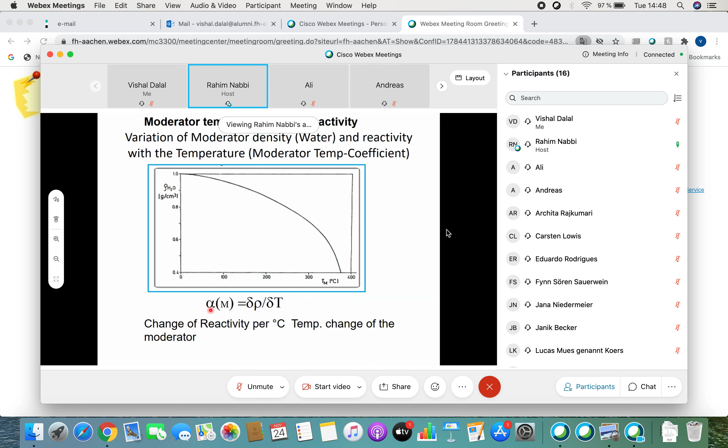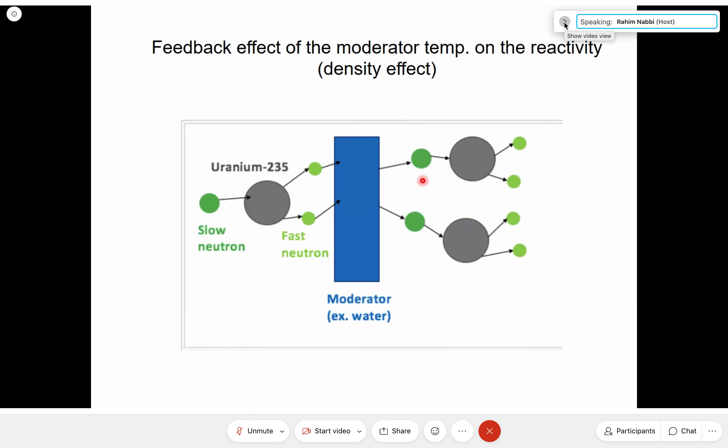The temperature coefficient of reactivity for the moderator is the change of reactivity per degree centigrade change of moderator temperature. The mechanism responsible is density: the higher the temperature, the lower the density of water as moderator, consequently the scattering rate is lower, and consequently there is a reduction of reactivity.

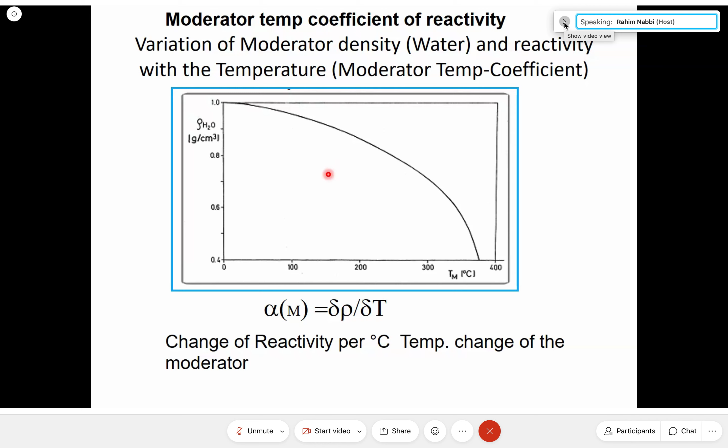Now, how could the temperature be determined? In order to get it, we have to solve the Fourier equation, similar to the neutron case. I said here is neutron current, but here it's heat flux, like we have neutron current or neutron flux in the neutron diffusion equation.

Here, change in temperature, derivation with respect to X, Y, Z. In the neutron diffusion equation, it was derivation of the flux, and there we had the diffusion coefficient. Here we have conductivity, because it is heat. This is the heat conduction equation, or Laplacian equation, similar to our diffusion equation.

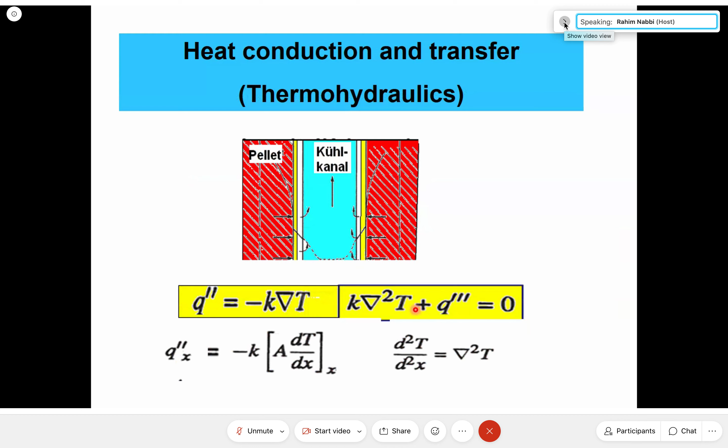Here we have a source term because of fission, how much energy or heat is produced because of fission. And here the second derivative of temperature, there was flux, and here again the conductivity. So if you solve the heat conduction equation, like in the neutron flux or diffusion equation, you get the temperature shape: high in the center of the rod, and of course lower at the boundaries.

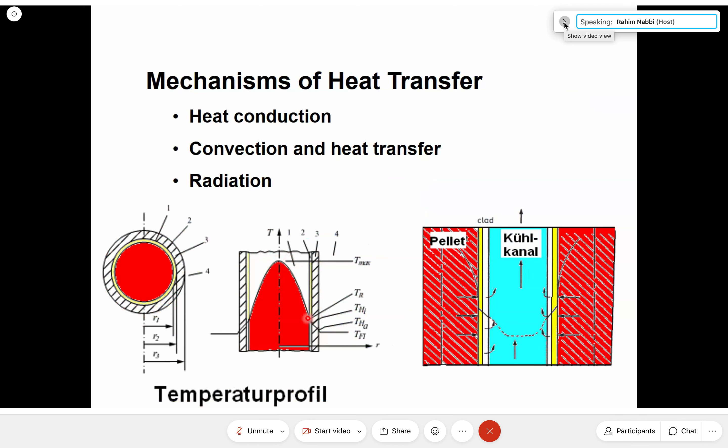And there is one additional relationship. Here is the solution, and you get the temperature maximum in the center, and at the outer boundary the difference depends on the radius of the fuel pellet in this case. So all this describes the temperature profile in the rod.

But what about the temperature in the coolant? It is then obtained by applying the heat transfer relationship, like this one here: this is coolant temperature, this is surface temperature of the solid material, for example the rod. The bigger the difference, the higher is the heat flux from the solid area to the coolant. H here is called the heat transfer coefficient, based on empirical correlations.

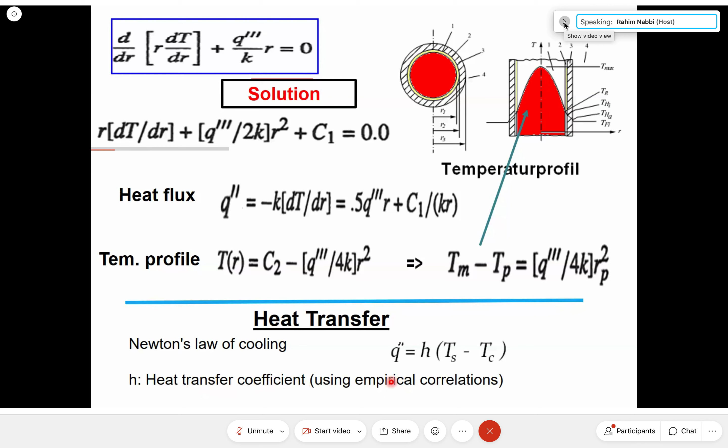I'm not going to repeat it again, but anyhow you can determine exactly how the temperature increase takes place from the bottom, from the inlet of a channel, to the upper part of the cooling channel. At every segment, heat is transferred from the rod, the red area, to the coolant, and the heated water goes as inlet to the next segment and is heated up again, so that at the end the temperature changes from inlet to outlet by a large amount.

You see here the relationship: temperature change because of the mass flow depends on the mass flow. The higher the mass flow, the less is the temperature increase, depending also on heat capacity. This is the temperature increase inside one segment, for example from here to here, or the channel from here to here.

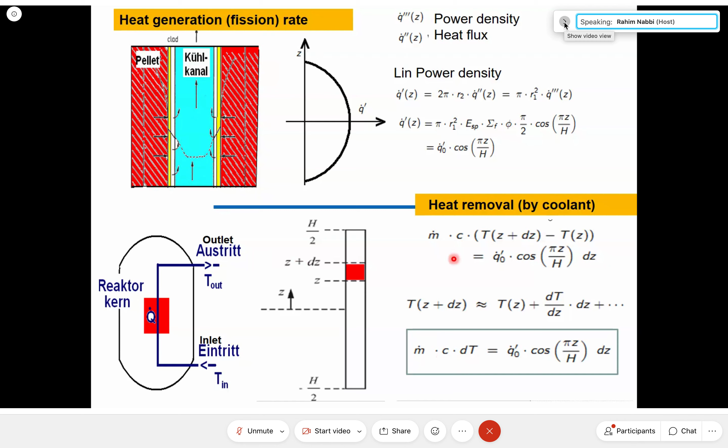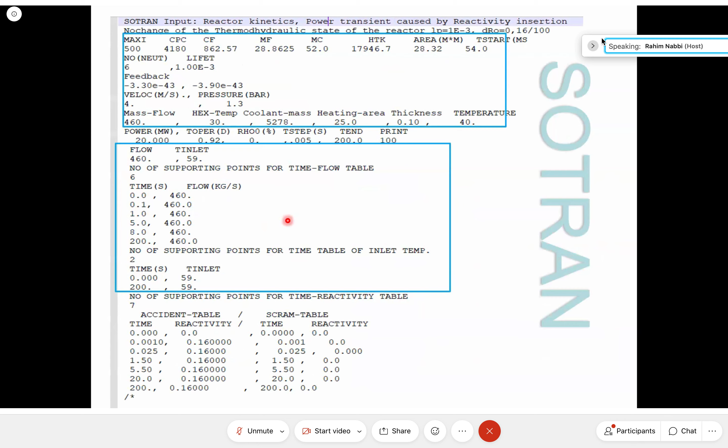Good. Now, I said during the last lecture too that SOTRAN is a multi-purpose code or package. It can be applied not only for reactivity incidents, but also for heat transfer phenomena and processes, and for mass flow, pumping failure, for example, different cases. For this reason, it should be applied for that type of case.

I would like to stop the presentation here. Today I told you we are going to use the SOTRAN code for two different packages: package one for neutron kinetics, and package two for reactor dynamics. There are well-defined questions here, and the answers to these questions should be produced or given by the SOTRAN application.

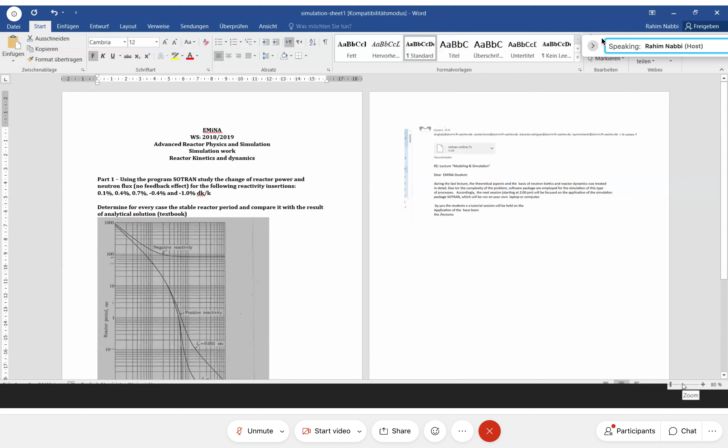Using the program SOTRAN, study the change of the reactor power and neutron flux, proportional to each other, with no feedback effect, for the following reactivity insertions: 0.1, 0.4, 0.7, -0.4 and -1% delta K to K. You remember what the unit is.

Good. And then determine for every case the stable reactor period. You remember the procedure for the reactor period, and compare it with the result of the analytical solution.

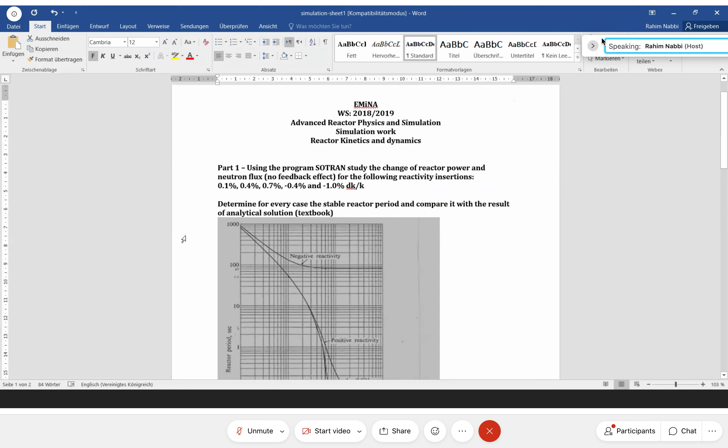Regarding the analytical solution, one point is, you remember this diagram? We saw this diagram today too.

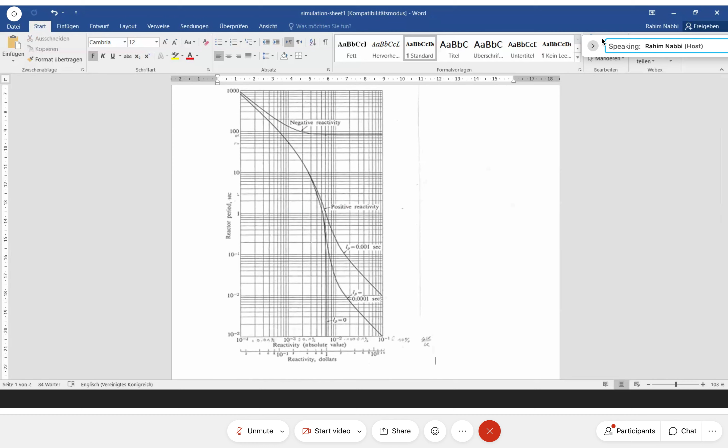If you take, for example, the 0.1% case, it means you take this value here, reactivity 10 to the minus 3, because the unit here for reactivity is absolute value. But in the question it was 0.1% delta K to K. That means 0.1 in absolute unit is 1 times 10 to the power minus 3.

And then you go here, positive reactivity, and you can read down how big the reactor period is. One can compare this with the very precise or correct solution from SOTRAN.

That is one comparison. The other one is you take the general analytical solution we discussed before. You remember this formula?

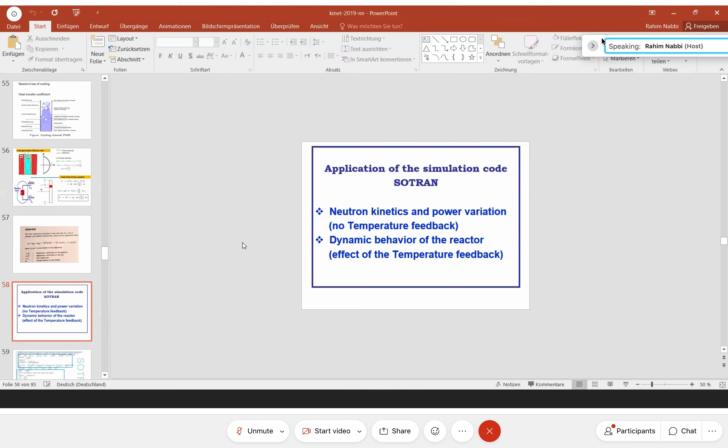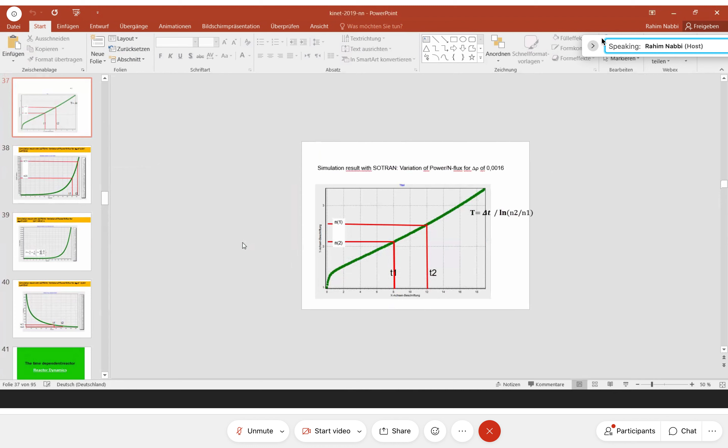So this formula, you see here, that is the stable reactor period. The inverse of this ratio here is the reactor period. So that gives two ways.

Again, from the graphic and from this relationship. For example, in the case of 0.1%, you need only to put for rho 0.001, and beta is available there, lambda is available there, and you can calculate.

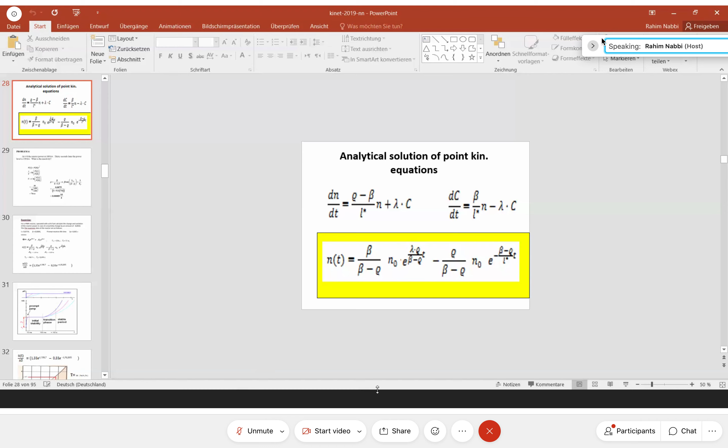And for the other cases, exactly given in this example, it is similar. There are other values, so similar.

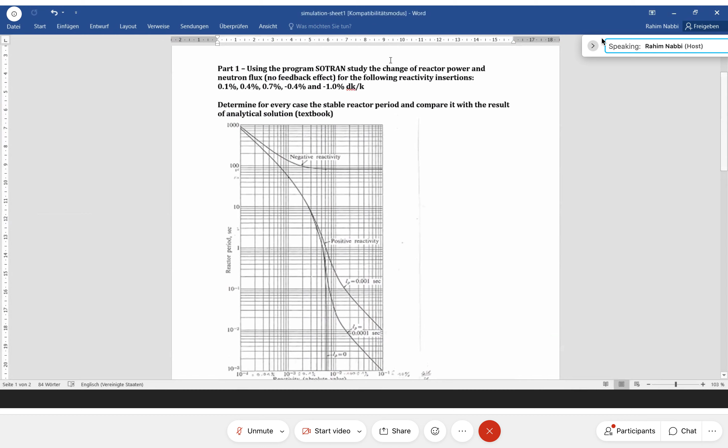And then the second part, second question, is to calculate the reactor's behavior, now dynamics: power, temperatures, for reactivity insertion 0.4% and 0.7%, under the consideration of feedback effect dynamics.

So in this case, again we run the Fortran code, but there is one line inside the input file describing the reactivity feedback effect. One is the temperature coefficient of reactivity for the fuel, and the other is for the moderator. For the reactor kinetic case, these two numbers are put as 0. But in this case, session 2, it should contain real or correct numbers.

And you would then get it. If we do that job, I would like to then tell how big the two numbers are.

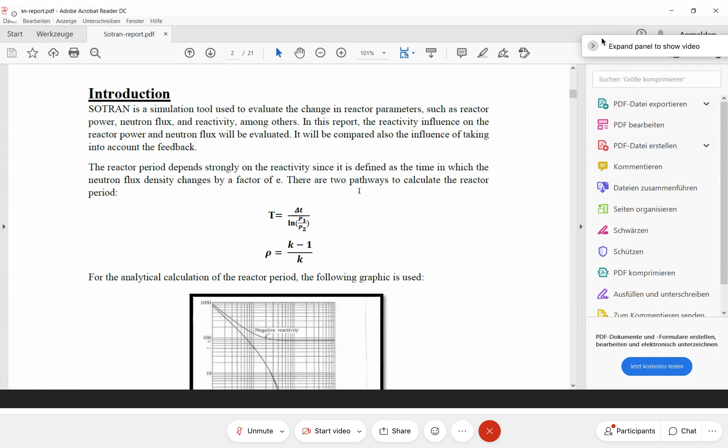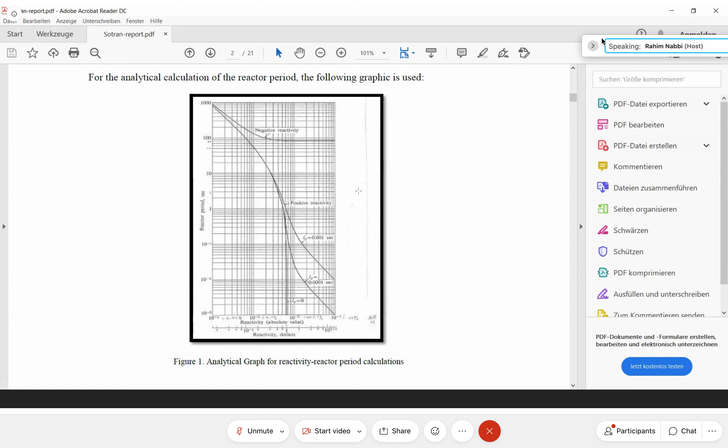You see here, that is the similar case. You remember the same diagram, in order to take the theoretical value and compare with the simulation results regarding reactor period.

So exercises, here's case 1, and you see here graphics of the reactor power log for 0.1, here is the time, and here is the reactor power. How do you get the reactor power?

In order to make a plot here, I would like to explain what the way is, because you have on your folder, which was sent to you, one additional plotting routine, and you can take the result of the SOTRAN calculation or simulation, and using that plot routine, we can produce such graphs.

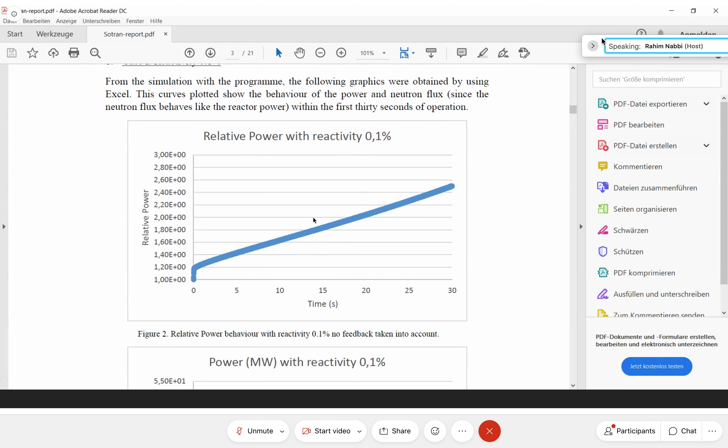And then we can determine, according to the formula—remember here, the formula here—according to this formula, you can determine the stable reactor period, and then again compare with the theoretical, two theoretical ways.

Good. So now I hope everybody could download the folder I sent to you. So it looks like...

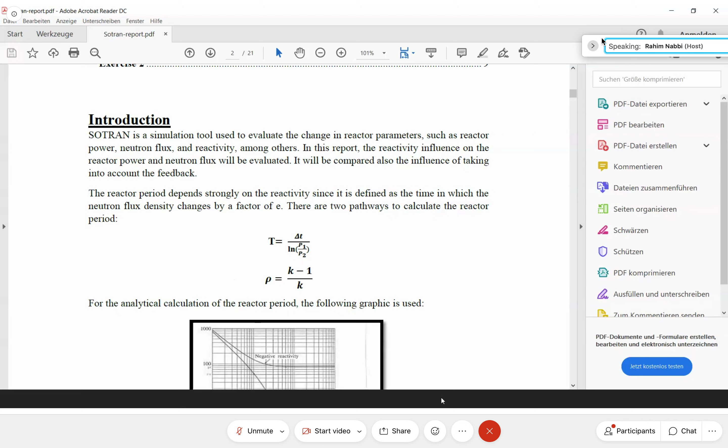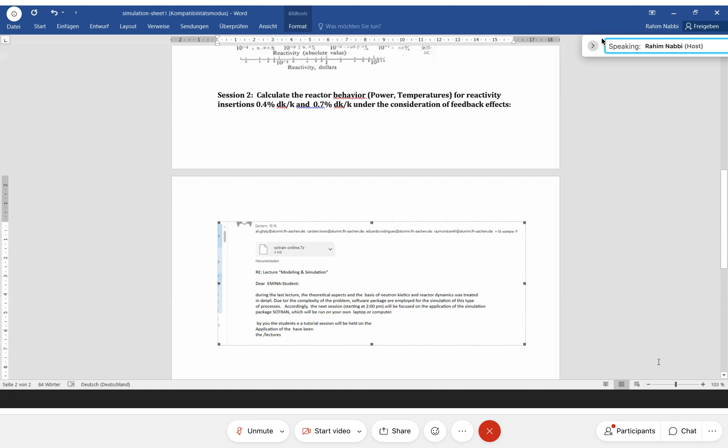You remember that this type of email was sent to you? You remember? And this email had attached a folder.

So the point is, now this folder is available on your email. Good. And I said what to do. The way is, you should first open your email and then download this 7-zip data file or folder.

If you download it, maybe it would be placed in your download list, or you can download it as a 7Z folder in any folder of your own. So after doing that, you can then unpack it. Because in this case, the packed case is not applicable.

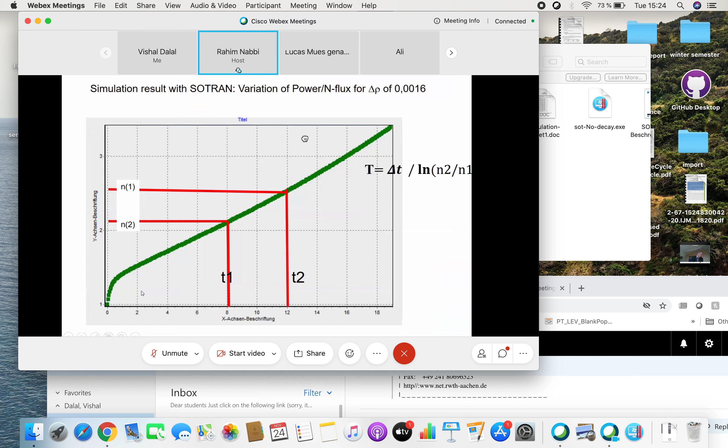You see, it is normalized to 1. That means if the power is 2000 megawatt, then every value has to be multiplied by that number. So it shows here very clearly an increase because of the reactivity insertion. See here? And one column here says rho 1. I hope you see it.

Rho 1, see here? In this case, in my output, it is 0.4%. But the first exercise, the first question, which has to be analyzed by yourself, is 0.1. That means it should be 0.1% delta K to K. Good, you see here very clearly.

So, rho 1, you see this column here, and then I go back to the third column, power D. This is decay heat power. I said before, because we produce fission product precursors, like the source for delayed neutrons, they produce power too. This is the fraction of the delayed decay heat, in this case 0.6%. Then the next column is flow rate, normalized to 1. Doesn't matter, because it has to be multiplied with the initial value.

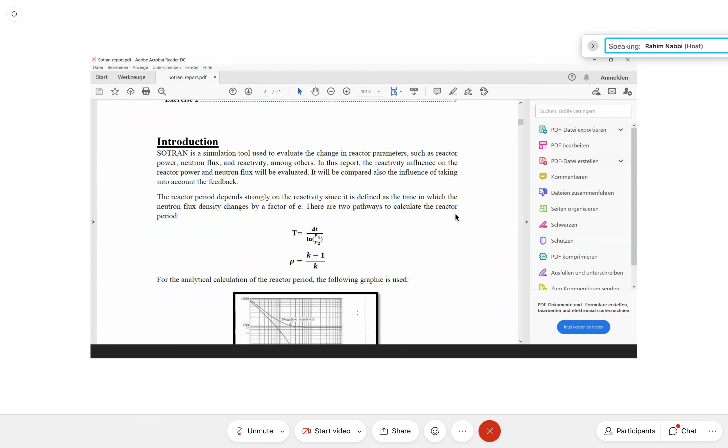You remember, like in other report, here in this report, you see power as a function of time. So this can be plotted by that routine. You don't need any additional program for it.

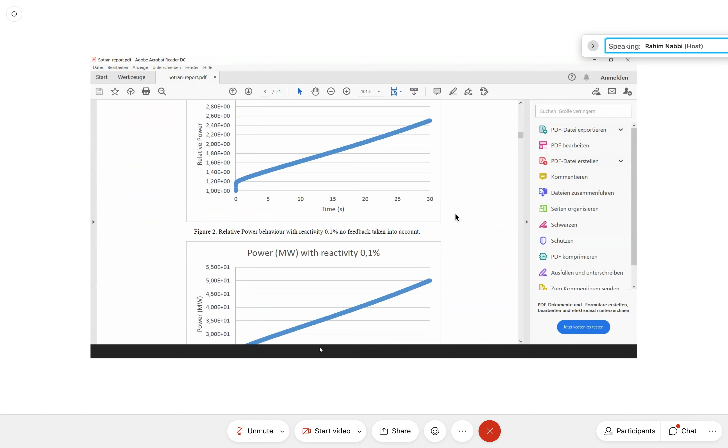So you go, click on it. You see, you get a warning. It says something cannot be opened. Please ignore this information. You can say okay, and then a new screen you find here, and this is for plotting instruction.

What data file do you want to plot? You can put here the name of, for example, what was it? I don't know how you named it. In my case it was rea0.1.out. I can put this name here, or I can take the button in the middle.

It says search for data file. If you say, Professor, we are just seeing a green box for the plotting program - moment, then I have to give it free. Moment.

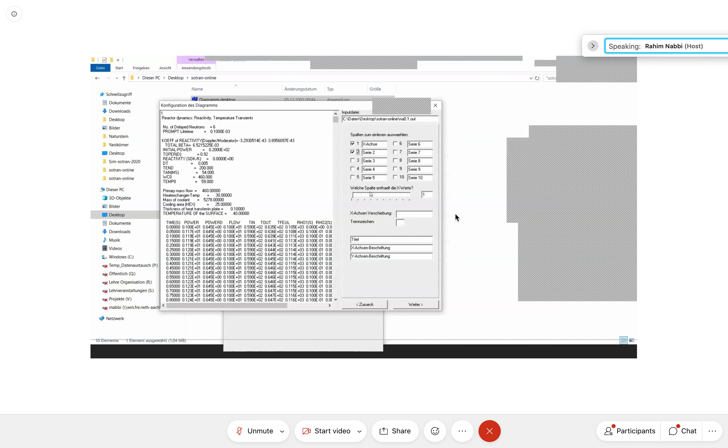So then you see here there is one additional box. It says what column should be taken for the x-axis. Here at the right-hand side you see 1. I hope, sorry, maybe you don't see it. So, do you see that - is then, I hope you have it.

If you have selected your data file in that screen and then say okay, then this screen would be appearing on your computer. So then that means your output file. And first step is, again, you see here at the top the name of the output file.

Then what columns or which columns should be used. The first one is x-axis, the second one here highlighted - second one would be then power, I am interested in. So, and then at the end of this box, the series, you find here what column is X again - it is 1, and you can put here, here's the x-axis for shifting and so on.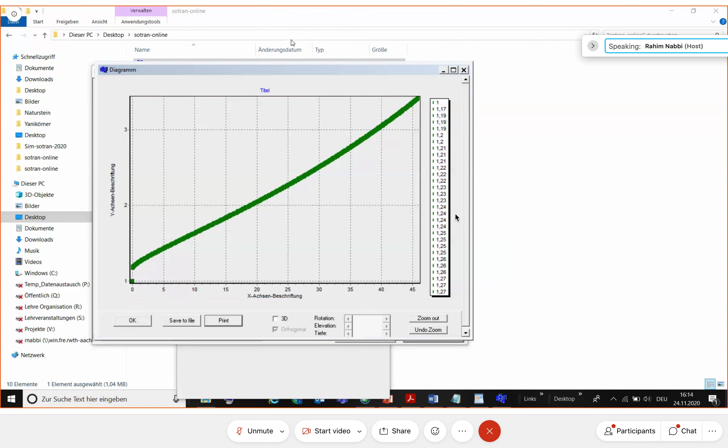Maybe you don't see, I can make it free. Oh, do you see it? Oh, you see it. That is the plot of our results.

And we didn't define any title for the y-axis or the x-axis, but everything can be set. We can also make it three-dimensional, something like three-dimensional, like here, for example.

So that would be then the power against time. So you can calculate here the reactor period. In order to make the reactor period, you remember we had one example: you take two times, for example at 25 and 35, and read down the corresponding value for power or flux from the y-axis. Use the formula, remember, delta T divided by the logarithm of the ratio of the fluxes. Then you have the period. Okay?

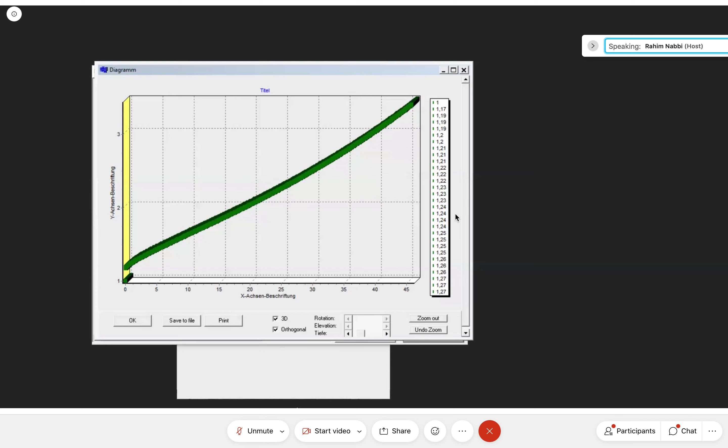I got a question, because when I wanted to plot the diagram, it just says that my program is not functioning. It says keine Rückmeldung mehr and just resets - no reaction from the system.

Correct. Yeah, maybe the reason is it didn't find your output file. You should then first search the bottom and the middle, sie durchsuchen.

Oh, I got the file, but after I marked all the data and want to do the plot of the graph, it doesn't work. Look, maybe your output file doesn't contain any values - look at it. No, it's the normal file, it has values.

So, did you delete the text line? Yes. Can you give your screen? Yes, I can share my screen, one second.

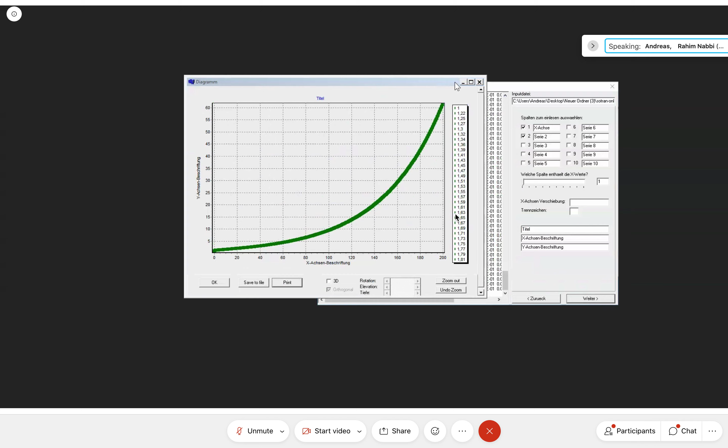Yeah, is that yours? Yes. No - when I click on... oh no, it worked! It works, yeah, but before that it just said keine Rückmeldung. Okay, then it's okay, the problem has been solved. Good, very good.

So, any further questions? Is everybody an expert in the application now? Maybe I have a short question. Yeah, please - I was just curious because...

Well, in the input file we just said that we have a reactivity of 0.1, put there, but in the output file, if you look, it just says 0.1 E minus 1%. Yeah, don't worry about that, because it is not a mistake in the output file, but it divides by itself by 10. That means if you find there 0.1 E minus 1, it means exactly 0.1. It is something inside the program.

Okay, so the important thing is what we write in the input file. Yes, exactly, you should be careful - only take that value which you have in your input file. Okay, and the number at the output is the same number but divided by 10.

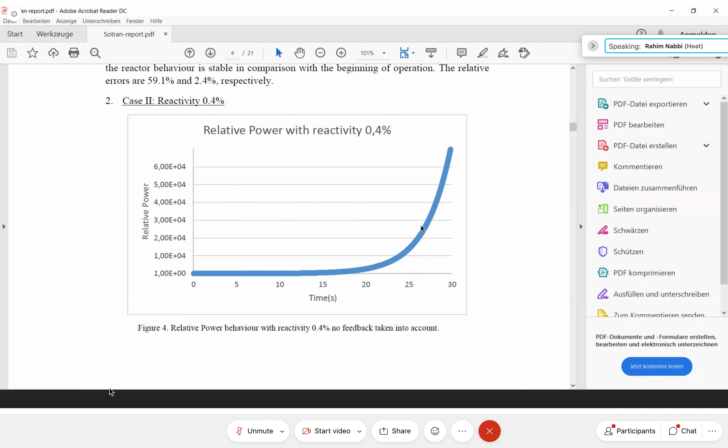Supercritical because this reactivity insertion is bigger than the contribution of the delayed neutrons. Practically, the reactor is not controllable. For this reason, you see here a jump to very high values. But anyhow, you can determine it.

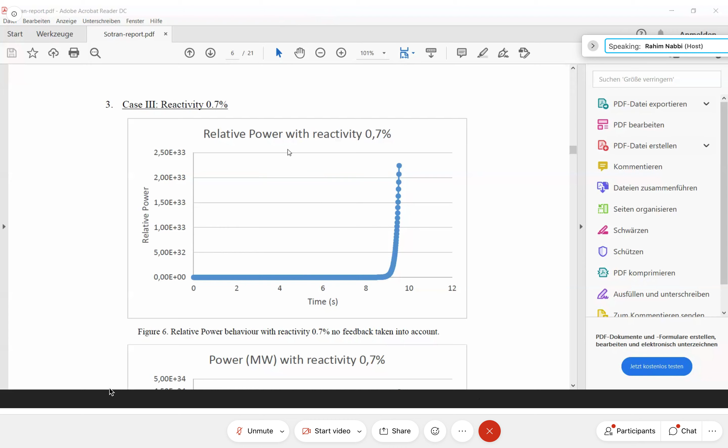But partly you can then, by checking these numbers, you can print every 10 steps or after every 10 steps or after every steps. You can control it, your output or your plot, by the variation of these numbers too. It is additional tools in optimization of your plots.

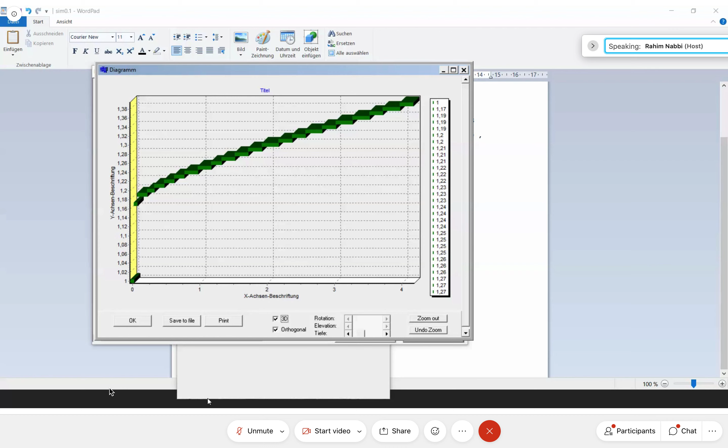Again, first you take one of your input files, for example sim 0.1, first rename it to, for example, 0.7. Then copy it to 0.7, open it, and at the bottom replace all values here, 0.1 to 0.7.

You can do it in one step with find and change, or find and replace, like here. Then you save it at the top left, not with a new name. You can run it, it's no problem. Go to your folder.

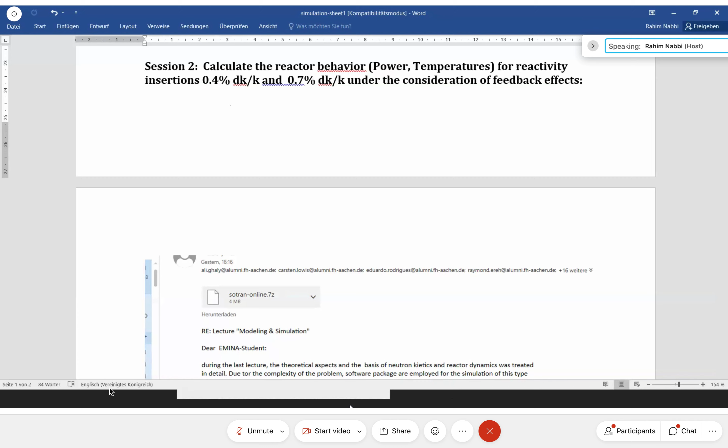You remember? And you take for this case your same input file. Do you remember the input file? Input file is 0.4. I hope you see it. So that is your input file, here, 0.4. First, rename it,

because now is the dynamic part. We call it sim 0.4 minus dy, dynamic. So only that. Or maybe it is better first to copy it in order to keep the kinetic one. First copy, and then insert. See, that is the copy now. And this copy should be renamed to dy, dynamic.

Now, if you have this frame, you open it. You should look to this input file for the dynamic case, and then shade it as you know. So I hope this is that one, you see? At the bottom of this file you see your number 0.4 everywhere, but at the top everything remains the same. No change, but you see the 6th or 7th line here, feedback.

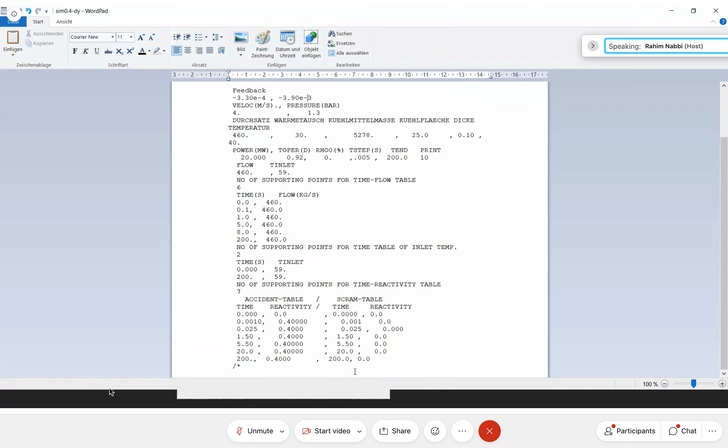So, and then we go to your folder, the new or dynamic case is available here. You run it, so run exe file. So it says you have it.

So again, I share it with you here. See, now input, say sim 0.4 minus dy INP. Then here the same, sim 0.4 minus dy minus out.

Is there something happened? No, it's correct. So you see this data file? You can open it. So I hope you see the output file.

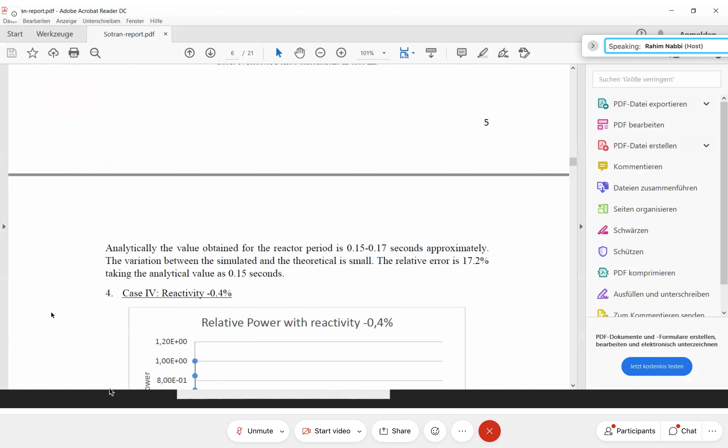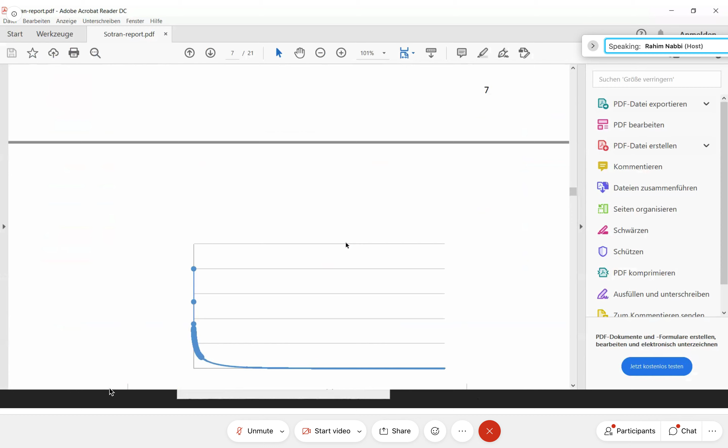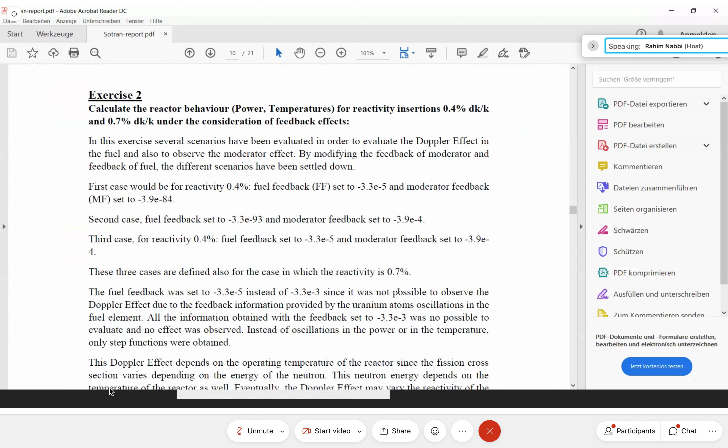The negative case. Exercise 2. You see here power for the 0.4 case, but other nuclear data. Then we have some oscillation in power here. I hope you see it.

Yeah, but the increase of the reactor power is limited. You get some stabilization here. It gets stabilized because of the temperature feedback, not continuously increasing.

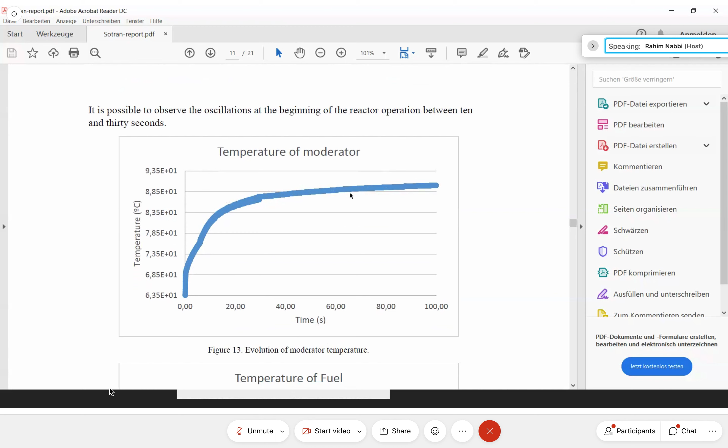So in this case, temperature of the moderator, for example, you see it goes higher from the initial value, increasing up to a given value. If the boiling temperature has been reached, and the power increase due to the net reactivity stopped, then the temperature of the coolant wouldn't be further increasing. And in case of the temperature of the fuel, similar situation, you see first increasing up to a given value.

After it, because the thickness of this curve is very big due to the oscillation, from one step to the other, the temperature goes, or the reactivity goes down, and then power goes down too, because of the feedback effect, and the temperature goes down. And because the temperature goes down in one step, the reactivity increases, power increases, and temperature goes higher again. It is an oscillation, but this oscillation results in a stable, very small range. You see, and finally the temperature of the fuel gets very slowly increasing.

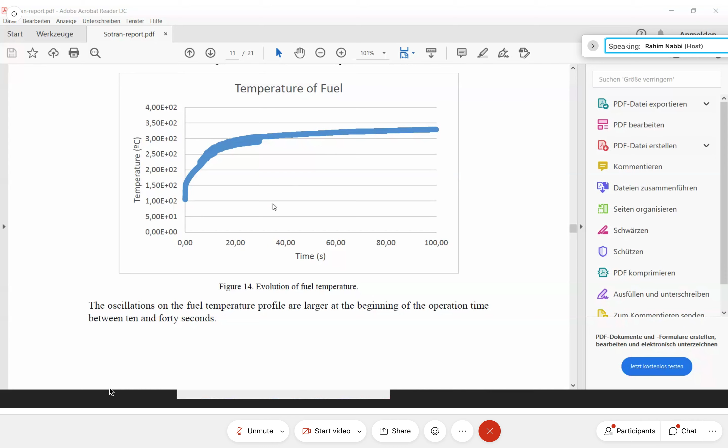But by plotting it, we should take into account again the time steps and then the range what you have. Good. By plotting again, take please the text line out.